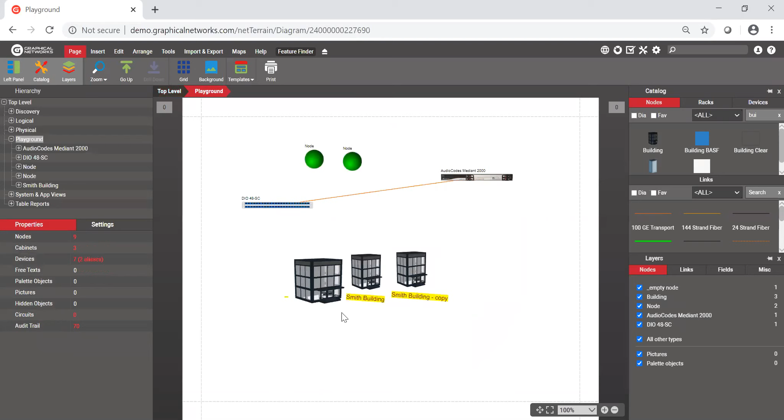So here I've got a whole bunch of stuff, I'm going to delete all this and show you how we manage cables. I'm going to bring in a building or two, but I should add a map here first. So with managing fiber, we refer to it as outside plant, but really it could be inside also. You need the OSP module in order to do fiber and fiber strands.

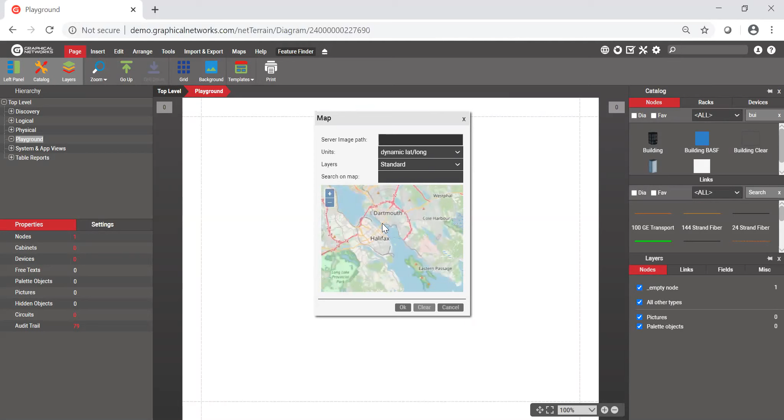With that you get the integration with OpenStreetMaps, so you can find a particular area of interest and add it in. I'm not in Halifax, I'm near Washington D.C., but Halifax looks interesting, so I'm going to use Halifax as my map. I've never been there. We're going to zoom in a bit on Halifax and add a couple buildings to show you how we can manage some strands.

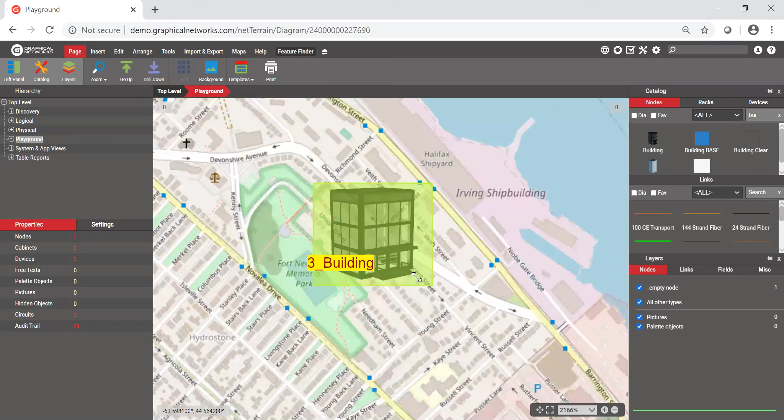So if I grab a building here and drag it in, it's way too big, so we'll make it a little smaller. Oh look, it's a Halifax shipyard, so we'll call this the shipyard. And then we'll add another building down here, no idea what that is, looks like it's in French. We'll assume, I'll call it the Smith building.

Pretty easy to do. Now, as part of outside plant, you might want to show paths, maybe a physical path, you might also show things like manholes or handholes. I'll show you examples of that, but I'm going to add a conduit here, so we'll go ahead and drag in a conduit between my buildings, add that in, and then I could add some bend points for this. So if this is going to follow a specific path, we can have it do that.

Something like that. It's a pretty intricate path there. I'll move this bend point out though. So something along those lines.

Yeah, so there's a conduit. And then, but what we're here for is some strands. So I'm going to do something simple like add just a patch panel. I got to go into my devices though if I'm going to add one.

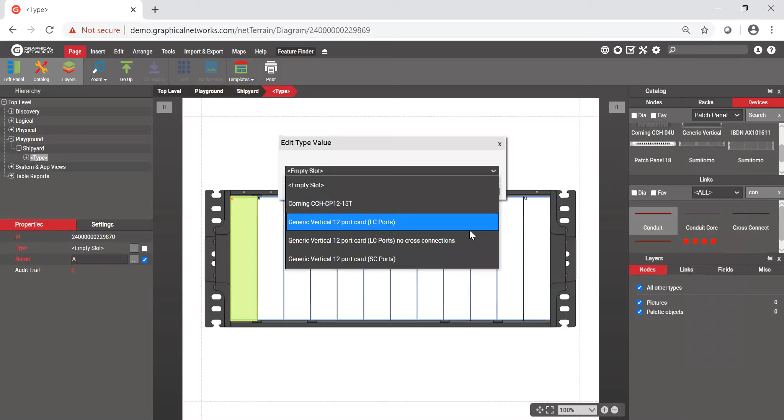I usually use the, let me see if I have the patch, the CCH. I usually like this Corning. Let's see if I have some cards in here. I'll add a card. Got an LC vertical. Seems like the right direction.

So we'll call this the shipyard patch panel, right? So we'll call this shipyard.

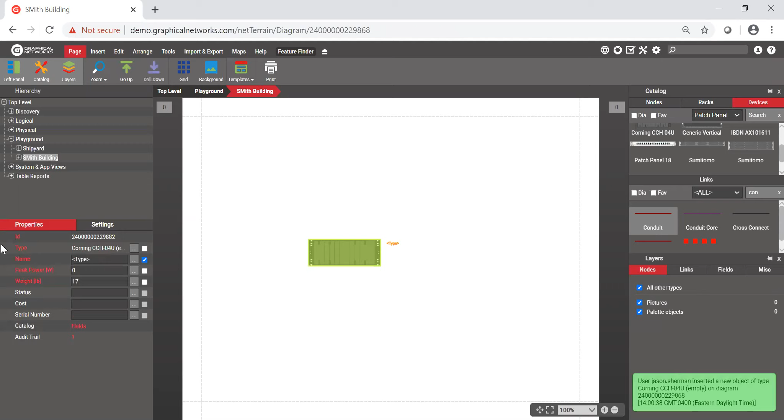So then if I come out of here and then my playground and go into Smith, right? Smith patch panel. And this is just to kind of show you what you can do in netTerrain, kind of what we're about.

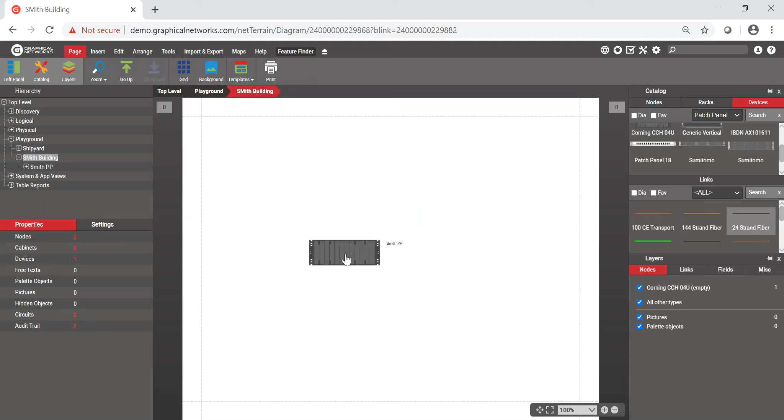Drag and drop. Now, if I want to grab myself a cable, something with some strands, I got a 24 strand here, we'll use that. So I need to connect 2 points together. So what I'll typically do is connect from, let's say, patch panel to patch panel with my cable. Again, if there's manholes in between, I might have strands getting spliced and all that stuff, but this is just a quick sort of simple example here.

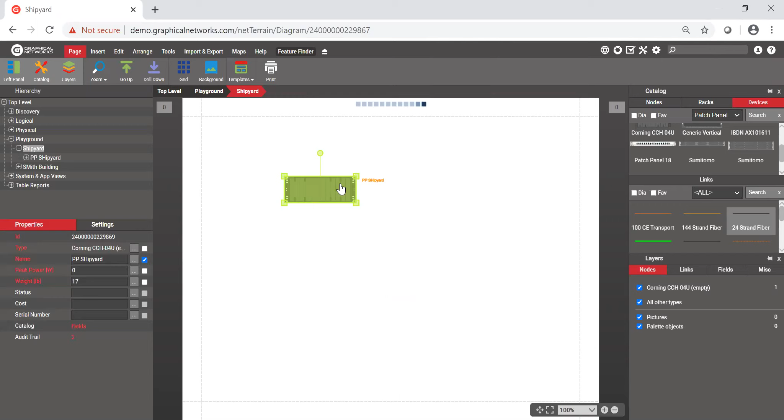So I'm going to keep it easy on myself. I'll show you maybe some other diagrams a little bigger, but here we have that cable. Nope, I didn't want to do that. But if we go to the map level, you'll see that there's a 24 strand that runs here.

And then this is the conduit. What I really want to do is take this and bundle it inside the conduit. So I'll do a bundle with copied links. So now this is technically inside this. So I'm not even going to show that 24 strand anymore. Turn it off. So now I got my conduit.

And if I look down here on the left, it says bundled links 1. So that tells me I have one cable inside the conduit. So nothing terribly hard to do. You could also do this with like Excel. You could import all the stuff I just did. So if you have thousands of connections and things, it's usually easier and better to do that way.

But the point is, now I've got a conduit, I got a cable that runs between, a 24 strand cable, but now we need to manage the strands. I mean, that's kind of what this whole thing was about, managing strands.

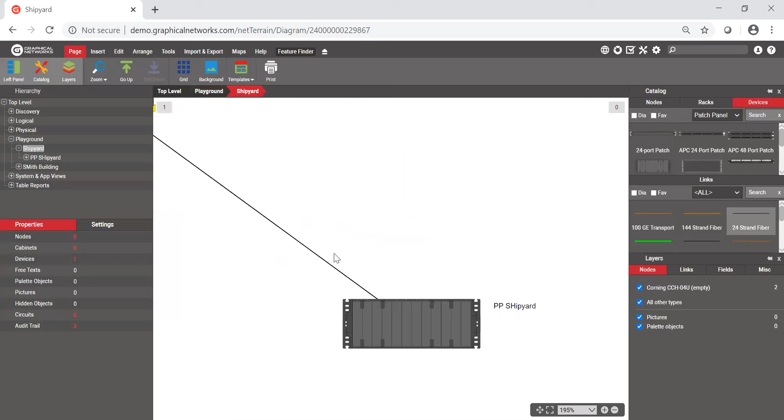So what I need to do is basically get back down into the level where I see this cable. And this cable, when I look at it, this is just a reference node, by the way. It's just telling me that this patch panel in the shipyard is connected to the Smith building patch panel. But this is the 24 strand cable. And if I look at the interface, this helps me manage the actual strands.

So this is the interface I would use to manage those strands, where I go in and say, okay, now I want to connect the actual strands that are inside this cable between 2 points. I mean, the cable itself usually comes into the building, maybe in the basement, and then sort of terminates. And then you got to take the strands off of it and put those into something like an LIU, patch panel, whatever it happens to be.

And I'm certainly no expert on all these different pieces of hardware out there. You guys that actually do hands-on with the strands and stuff would know about the interfaces and the proper terminology. But ultimately, what you're looking to do is, one, you got to put the cable somewhere, and two, you got to terminate your strands.

So this is what you use to terminate the strands. This tells you I've got 24. I can scroll down and see the 24. They're numbered. You can rename these if you want for this particular cable. Buffer tube color, strand color, and then you get the button here to edit the strand terminations.

And this allows me to go in like the Smith patch panel, card A, or the shipyard card A, and connect the strands. So I can go the B side to B side or B side to F side. That's whatever. So I'll do B to F, right? Back to front. Or maybe it's front to front or back to back.

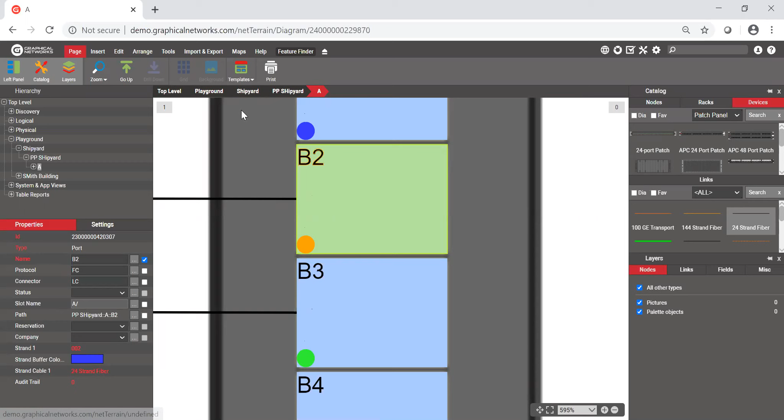I didn't actually name that cable. Normally you'd want to name your cables. So for instance, if I change this, not just call it a 24 strand fiber, but maybe 24 fiber Smith to Shipyard.

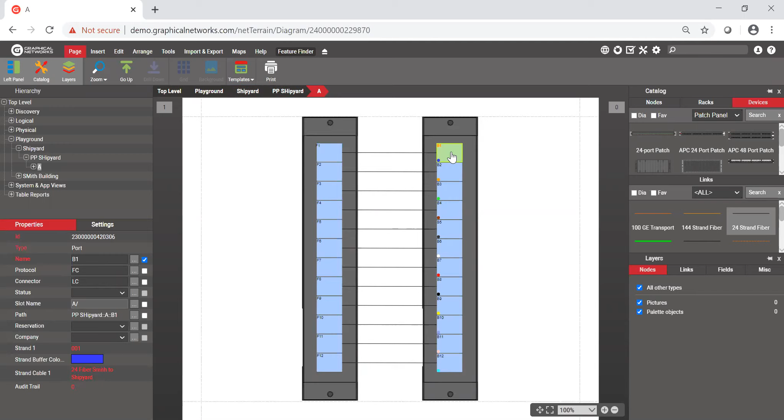A lot of you guys probably use just some numbering, crazy generic numbering or whatever. But if I come back in here and I look at this, it says 24 fiber to Shipyard. So I know what cable and what strand is connected to this particular port. So now you've got a lot of information. You know the cable, you know the strands, you know how they're connected, and so on.

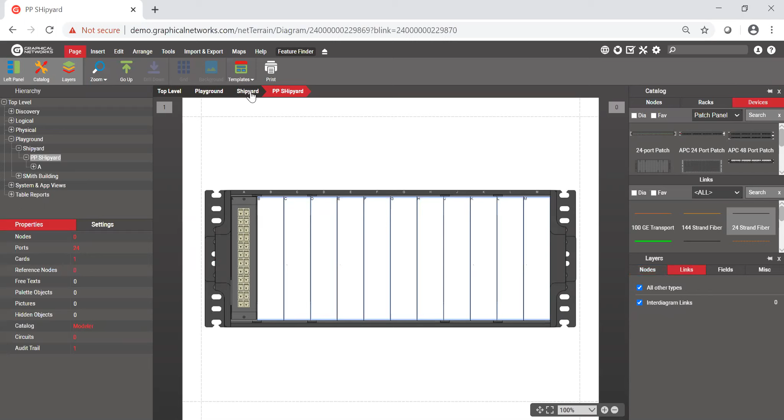And you know this cable is part of, if we go up, we know this cable is connected between these two points, and it's also inside, it's got a container. And I know this cable is part of this particular conduit. So if I do show on diagram, it will basically take me to it and say, here I am. So that's how you start to build out connections.

And if you have lots and lots, which a lot of you might, many buildings, many patches or manholes, handholes, which is fine, then you get into doing things with automation, using Excel import, bringing data maybe from data sources and things like that. It just depends on your system and what you guys have.

So to show off some examples, a little more detailed, let's go here to U of M. This one actually shows sort of like what I was showing there, where you had a map. This is a lot more paths. Oops, didn't mean to do that. So let me do an arrange and undo that. Let me zoom in. So you've got here multiple buildings, multiple segments, conduit, ducts, whatever you guys use.

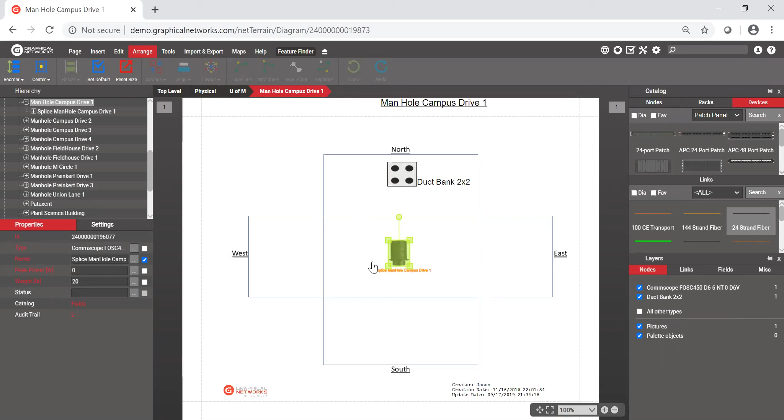Here I've got a manhole. In this manhole, I've got a device, a CommScope FOSC. And inside that has the different CommScope splice cards. And if you go into one of those, you'll see the tray and the connections. So you've got one side connection to another side of the connection, one side port, the other side port. This is acting as the splice between the two.

So this is a strand coming in from the 72 strand fiber cable, and it's connecting up to a 288 strand fiber cable. So you're splicing those together. I don't think I have the background image on this thing, so let me turn that on. So then we can see the actual splice, you know, case, and so on. But that's how that works.

And if I double click on this link, the splice itself, it'll show me the path between the two fiber cables, and then any other strands that are connected together. So this is showing you the full path.

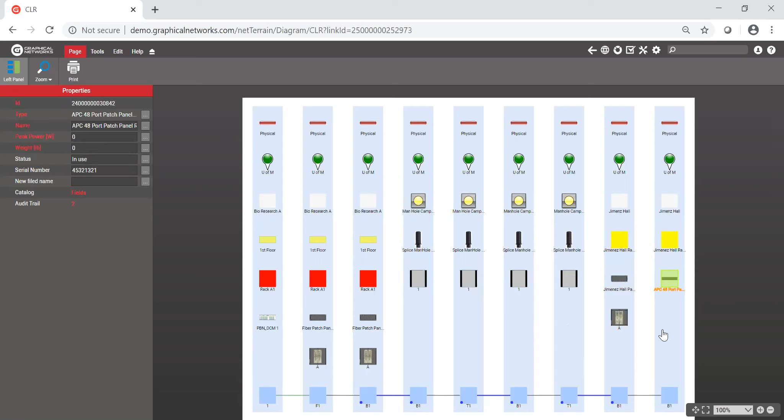It's showing you a device port connected to a fiber patch panel. That patch panel connects over to the splice in the manhole, and that splice in the manhole connects to another splice in a different manhole, manhole 1, manhole 2. That in turn splices through back to another patch panel in a different building, Jimenez Hall, and then ultimately terminates to a 48 port patch panel, separate patch panel. So it's gonna be the full path, and you can see it goes across different hierarchies and things like that.

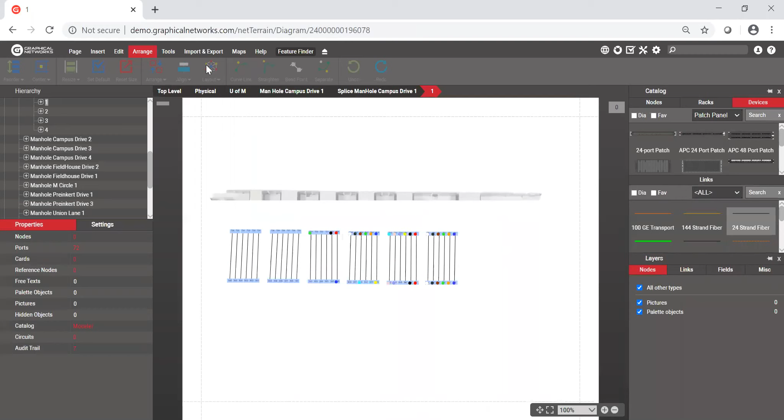You can also build circuit paths. So those are defined paths. I think I have one. Let me jump to another project here, another demo project, that allows you to see... let me get out of this one.

So once you have all this data in the system, you can do what we call the ACRA. It's an algorithm to determine a path, to calculate a physical path between two points. So if I'm going from something like Canton to Greektown, it's a little hard to see, zoom in a little, right? I want to know if there's fiber in between these two points. What is that path? Does it exist? I don't know if there is.

Let me do show full circuit. Oh, sorry, I have to log on. It's helpful if I log in. Once I'm logged in, then I can do the calculation, because you have to be at least an editor to do that.

So now we can go back and do Canton to Greektown. Select those two, and tools, circuits, create new circuit, and it calculates the strands that are available. So it tells me which strands I have, and it's going to choose the first two. You can change that if you want to. Then you can choose what kind of path it's going to go: do you want end to end or edge to edge? Edge to edge is usually like patch panel to patch panel, where end to end is going down to basically the device level, and having it show that path. So then you go through and have it create a path between the two, and the circuit.

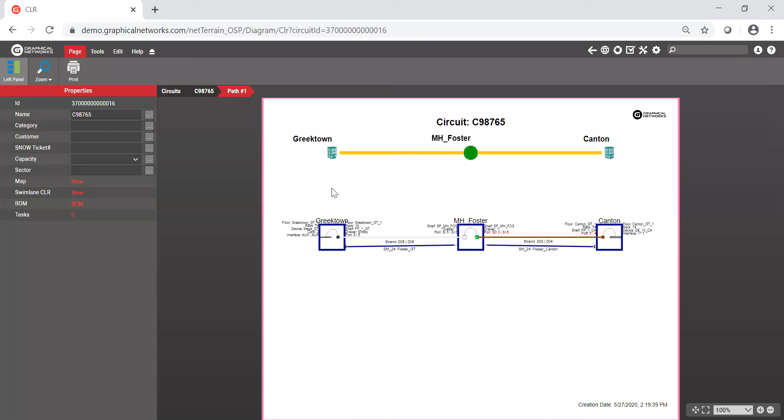But the maps, what maps are these? The maps are OpenStreetMaps, so that's what we integrate with, OSM. Currently that's the only map we integrate with. It's very detailed, latitude, longitude, etc. It's very good, it's been around forever. You can actually manage the underlying map if you want to go into OpenStreetMaps and add things to it. You can certainly do that.

Patch panels, do we need to create them, or is it included? Patch panels are part of the software. We have lots of devices, thousands of device types. And if they're not there, you can request devices from us through our Zendesk portal. You can ask us, hey, we'd like to use a patch panel XYZ, can you model it for us? And then we send it to you.

Is netTerrain desktop or cloud? Well, you log in through your browser, like I was using my Chrome browser to do everything, and you just log in. As far as licensing goes, we offer a cloud option, so if you want us to host it for you, we can, or you can get the software and install it yourself. It's Windows software, so you would have to install on a Windows server and use SQL Server as the database, but you could use a VM, and an existing database too, for that matter. If you want to put it into some farm, you can certainly do that.